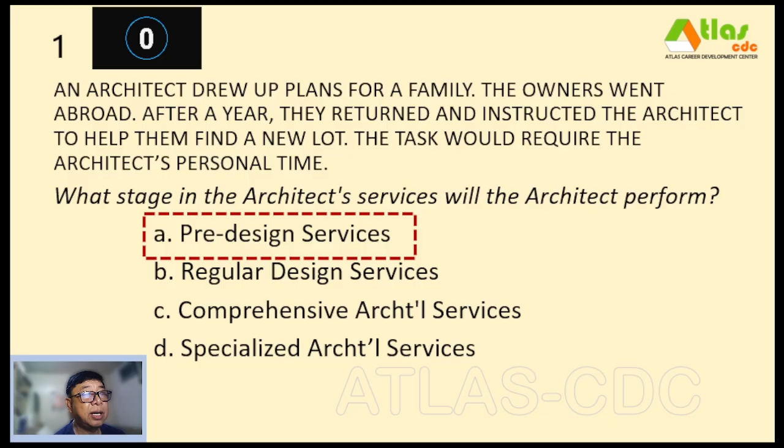Our correct answer is letter A, Pre-design services. Finding a new lot is under site selection and analysis under SPP Document 201, Pre-design Services. This entails the formulation of site criteria, assistance to the client in site evaluation, as well as analysis of the site to determine the most appropriate site or sites for a proposed project or building program.

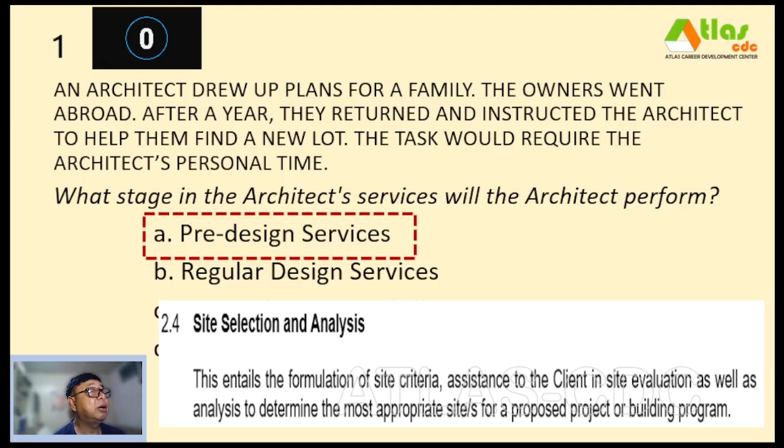Same situation, number 2. What will be the ideal method of compensation that the architect should use if he is to find a new site for the project? A. Percentage of construction cost. B. Per diem plus reimbursable expenses. C. MDPE. D. Lump sum inclusive of architect's fee.

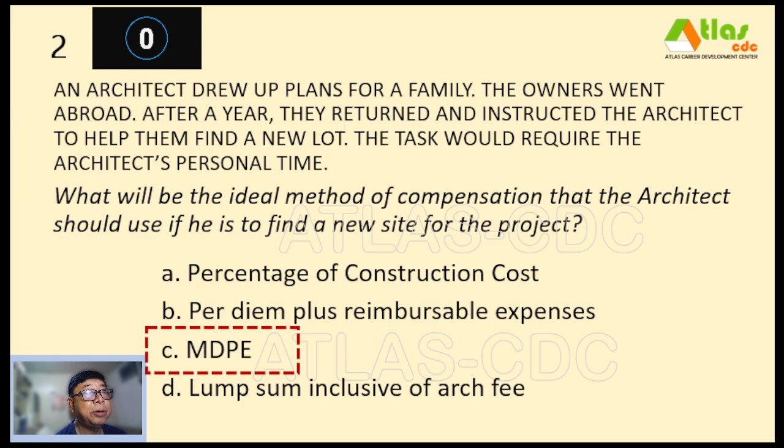Our correct answer is MDPE, or the Multiple of Direct Personnel Expense. Under pre-design services, MDPE is the most preferred method of compensation. This cost-based method is applicable only to non-creative work, such as accounting, secretarial, research, data gathering, preparation of reports, and the like. This method is based on technical hours spent and does not account for creative work, since the value of creative design cannot be measured by the length of time the designer has spent on his work.

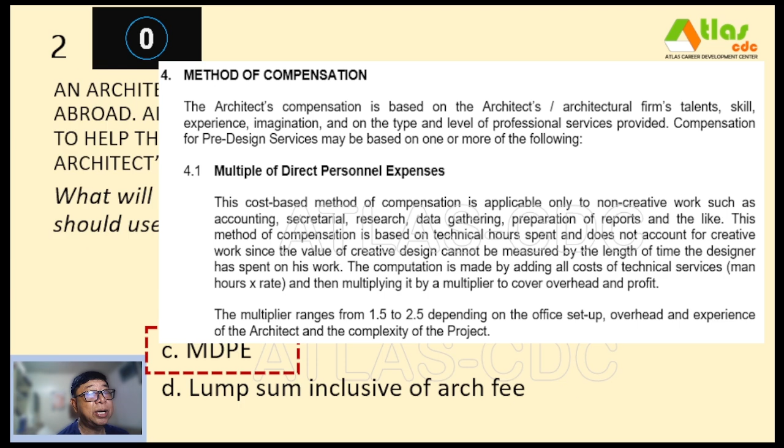The computation is made by adding all costs of technical services, man-hours times rate, then multiplying it by a multiplier to cover overhead and profit, wherein the multiplier ranges from 1.5 to 2.5 depending on the office setup, overhead, experience of the architect, and the complexity of the project.

The architect is asked to help find a new lot, but since that involves additional time and cost, suggesting a ready property—house and lot that only needs renovation—is a reasonable compromise to minimize spending and effort. While renovation can be more expensive per square meter, in this context, it minimizes overall expenditure because it avoids both buying land and building entirely new.

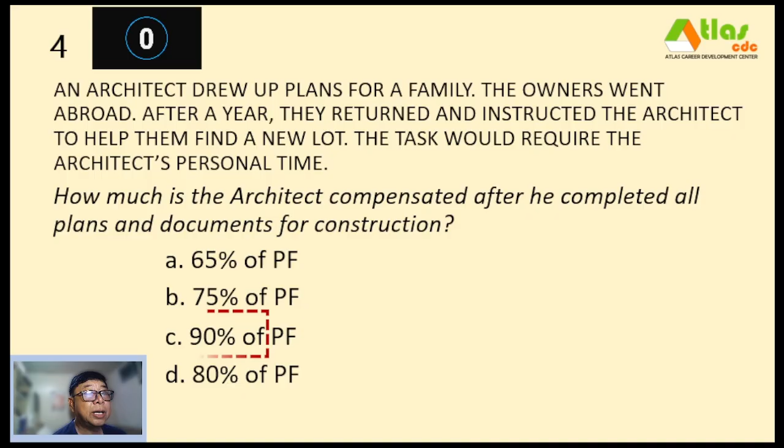Our correct answer is letter C, 90% of PF. As per the breakdown of payment, upon completion of the contract document services, the architect must have already received 90%. The total payments made to the architect should already total 90% of the professional fee.

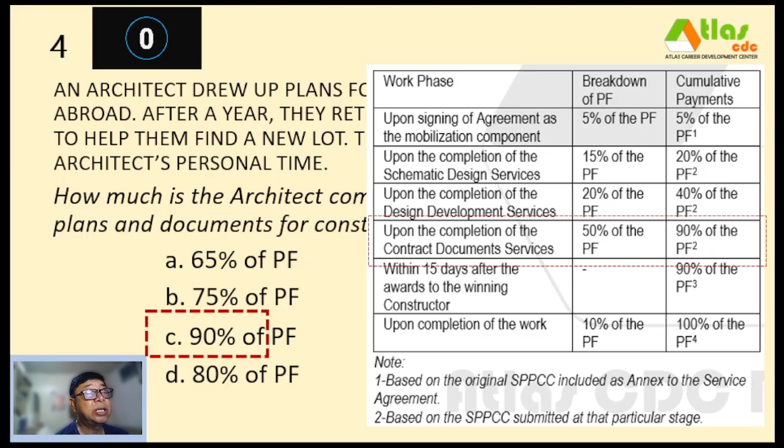Number 5. An architect who had been working in Singapore for 15 years decided, together with his family, to renounce his Philippine citizenship and acquire Singaporean citizenship. Since Singapore does not allow dual citizenship, he ceased to be a Filipino citizen. Upon returning to the Philippines, he was commissioned by a former classmate, now a property developer, to design a subdivision project. However, when he submitted the construction drawings, the Office of the Building Official (OBO) denied the building permit application. So what went wrong? A. The architect is already a Singaporean and not allowed to practice in the Philippines. B. The architect should have a permit to practice from PRBoA, given that he is a previous Filipino RLA. C. The architect failed to sign and seal the drawings. D. Error found in the drawings.

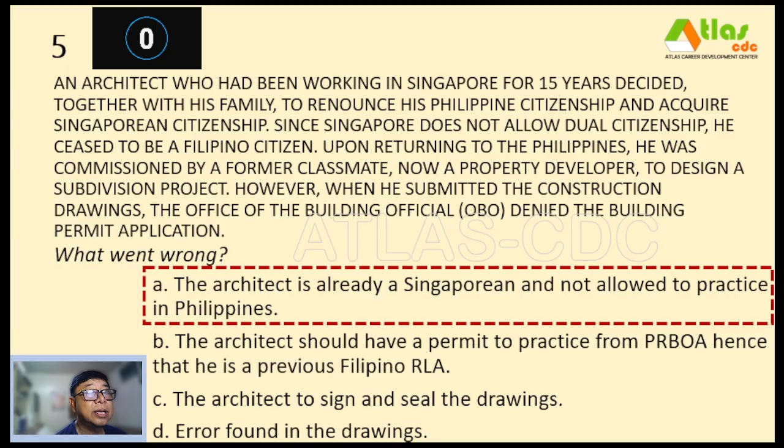Our correct answer is letter A, the architect is already a Singaporean and not allowed to practice in the Philippines. Under RA 9266, only a Filipino citizen who is a registered and licensed architect may practice architecture in the Philippines. Since the architect renounced his Philippine citizenship and became a Singaporean, he automatically lost his privilege to practice as a Filipino architect. Even though he was previously an RLA, foreign architects, including former Filipinos, can only practice in the Philippines if they obtain a temporary special permit from the PRC and PRBoA in accordance with Section 38 of RA 9266. Therefore, the OBO was correct in disapproving the building permit because the architect was no longer authorized to sign and seal architectural documents in the Philippines.

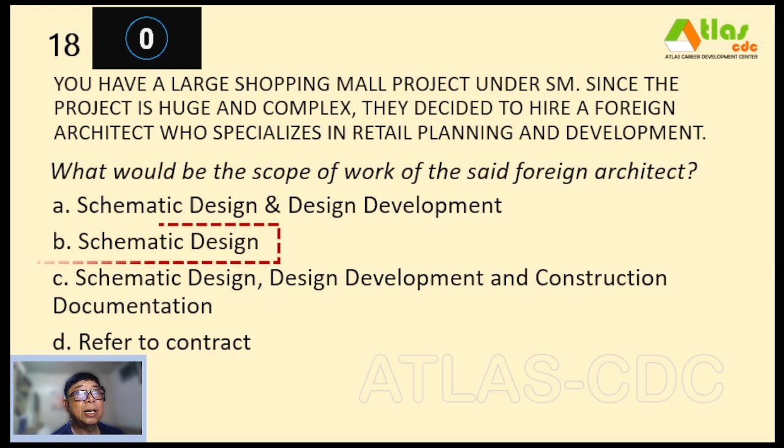Our correct answer is letter B, schematic design. In projects involving a foreign architect, the foreign architect is usually brought in for specialized services such as the conceptual design or schematic design for retail or mall projects. The local counterpart architect, also called the architect of record or AOR, is responsible for design development and contract documents, that is, construction documents. This is because only a local RLA, registered and licensed architect, can legally sign and seal documents and practice architecture in the Philippines.

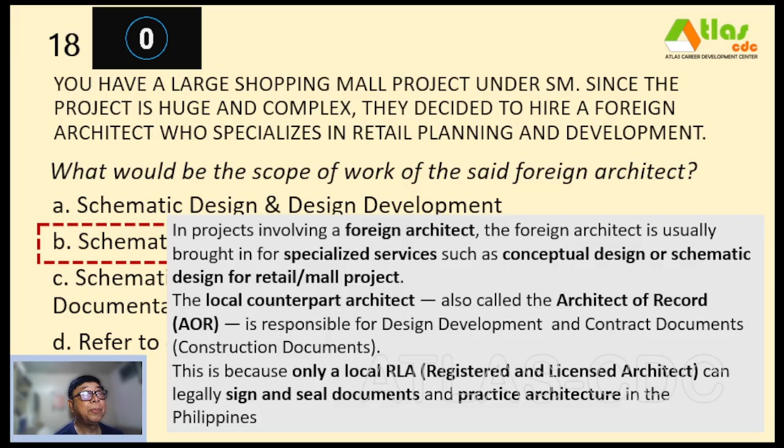Number 19, same situation. What would be the legal role of the said foreign architect under RA 9266? A. Retail architect. B. Consulting architect. C. Design consultant. D. Architect of record.

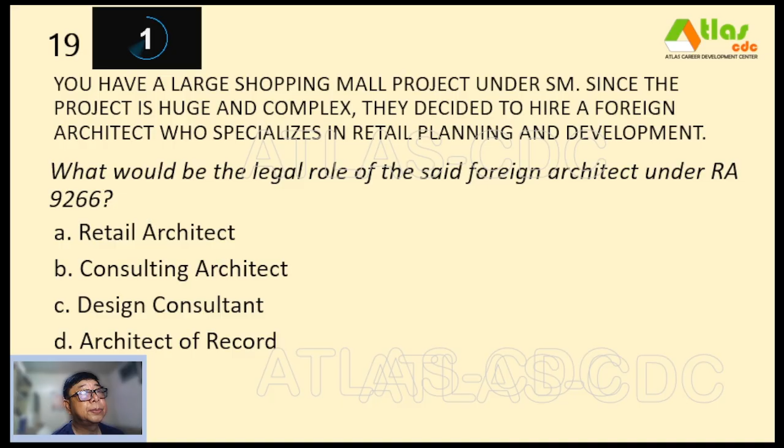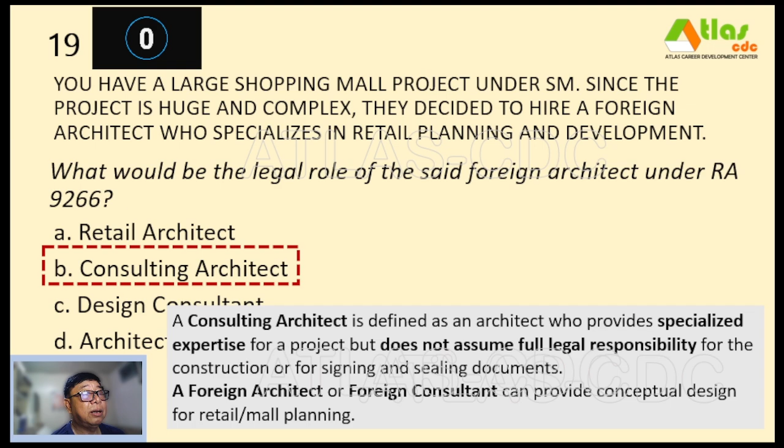Our correct answer is a consulting architect or foreign consulting architect. A consulting architect is defined as an architect who provides specialized expertise for a project but does not assume full legal responsibility for the construction or for signing and sealing documents. A foreign architect or foreign consultant can provide conceptual design for retail or mall planning.

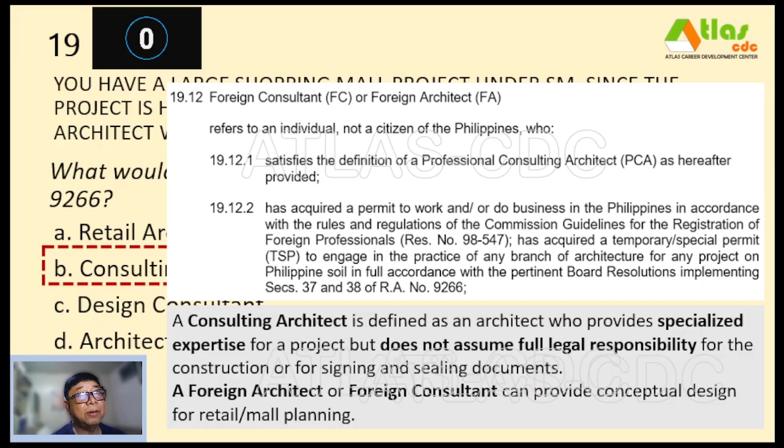The definition of foreign consultant or FC or foreign architect refers to an individual, not a citizen of the Philippines, who satisfies the definition of a professional consulting architect as hereafter provided, has acquired a permit to work or do business in the Philippines in accordance with the rules and regulations of the Commission guidelines for the registration of foreign professionals, has acquired the temporary special permit or TSP to engage in the practice of any branch of architecture for any project on Philippine soil, in full accordance with pertinent board resolutions implementing sections 37 and 38 of RA number 9266.

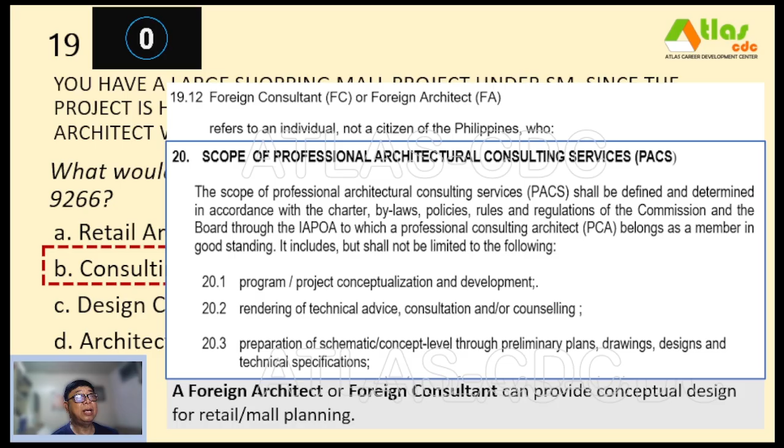So this is the scope of professional architectural consulting services or PACS. This is SPP document 209. The scope of PACS shall be defined and determined in accordance with the Charter, bylaws, policies, rules, and regulations of the Commission and the Board through the IAPOA, to which a professional consulting architect belongs as a member in good standing. It includes but shall not be limited to the following: program, project conceptualization and development, rendering of technical advice, consultation or counseling, and preparation of schematic, concept level through preliminary plans, drawings, designs, and technical specifications. This is for a Filipino consulting architect.

Number 20, same situation. What would be the role of the Filipino architect under RA 9266? A. Retail architect. B. Consulting architect. C. Design architect in collaboration with expert consultant. D. Architect of record.

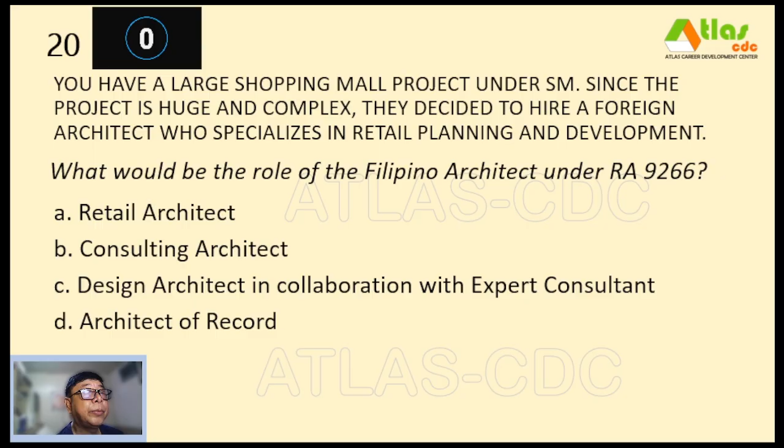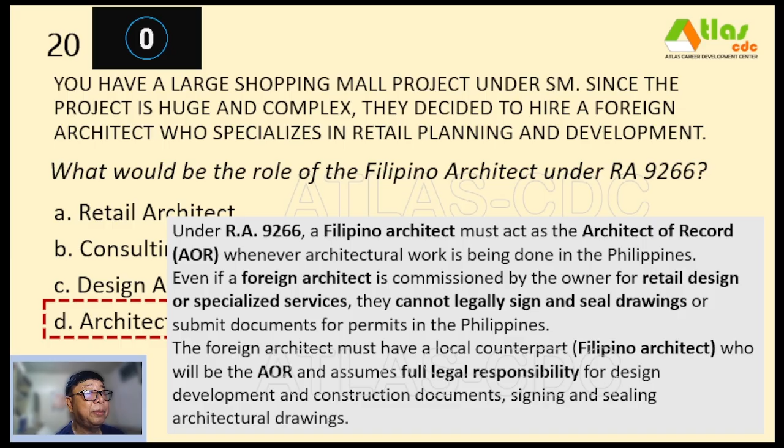Our correct answer is letter D, architect of record. Under RA 9266, a Filipino architect must act as the architect of record or AOR whenever architectural work is being done in the Philippines. Even if a foreign architect is commissioned by the owner for retail design or specialized services, they cannot legally sign and seal drawings or submit documents for permits in the Philippines. The foreign architect must have a local counterpart or Filipino architect who will be the AOR and assumes full legal responsibility for design development and construction documents, and signing and sealing of architectural drawings.

Number 21, same situation. What would be the scope of the Filipino architect? A. Schematic design and design development. B. Schematic design. C. Construction documentation and quality assurance. D. Refer to contract.

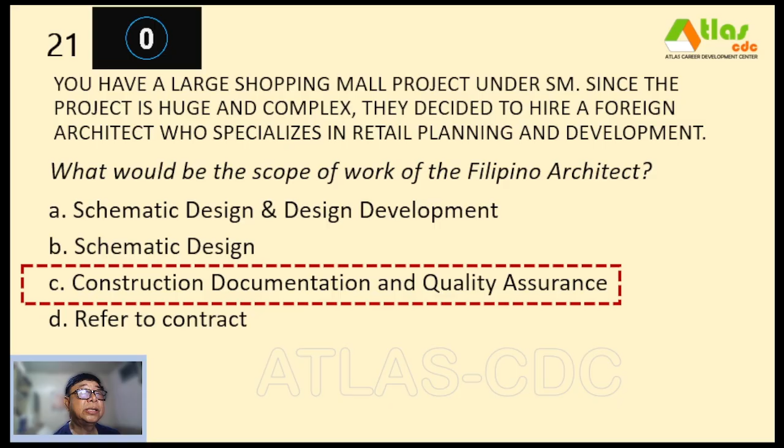And our correct answer is construction documentation and quality assurance. But it should be design development, because design development phase, contract document phase, and construction phase will be the role of the Filipino architect, okay?

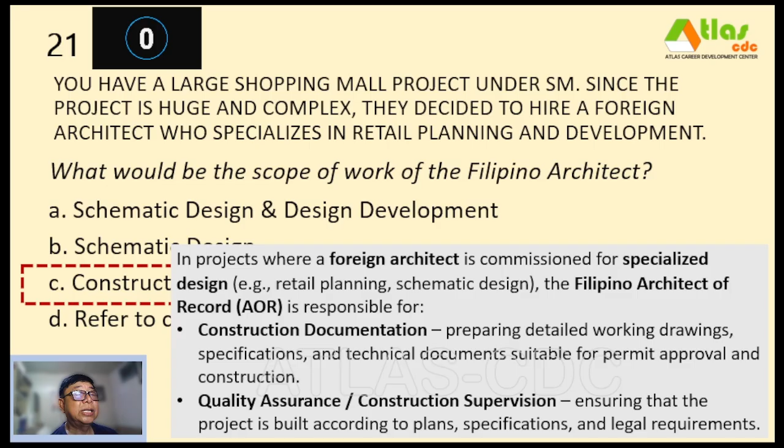So in projects where a foreign architect is commissioned for specialized design, that is retail planning, schematic design, the Filipino architect of record or AOR is responsible for construction documentation. This is the design development and contract document phase, preparing the detailed working drawings, specifications, and technical documents suitable for permit approval and construction. On the construction phase, quality assurance and construction supervision, ensuring that the project is built according to plans, specifications, and legal requirements.

So number 22, same situation. As far as the civil liability of the project is concerned, who is liable when the building collapses due to faulty construction? A. Architect. B. Architect in charge of construction. C. Consulting architect. And D. Architect of record.

And our correct answer is letter B, the architect in charge of construction. So the architect in charge of construction means an architect registered and licensed under RA number 9266 who is directly and professionally responsible and liable for the construction supervision of the project. So this is the liability under the civil code, the contractor as well as the professional in charge of construction, or the architect in charge of construction.

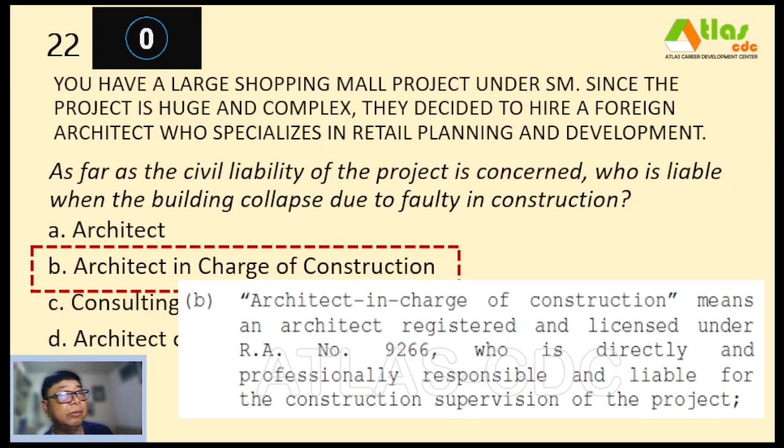So number 23, same situation. On this project, who is the professional that is academically qualified and with exceptional or recognized expertise or specialization in any branch of architecture? A. Architect of record. B. Foreign architect as consultant. C. Architect in charge. And D. Local architect.

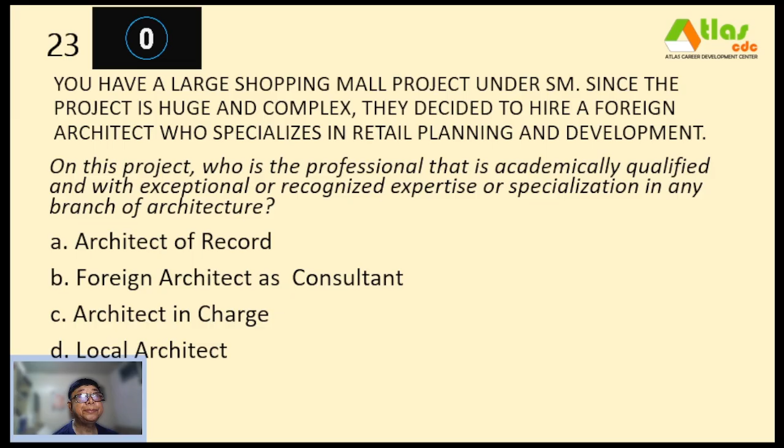And our correct answer is letter B, the foreign architect as the consultant. So a consulting architect means the architect registered and licensed or permitted to practice under RA number 9266 who is professionally and academically qualified and with exceptional or recognized expertise or specialization in any branch of architecture. So the foreign architect as the consulting architect. A foreign consultant refers to an individual, not a citizen of the Philippines, who satisfies the definition of a professional consulting architect.

24. After the hospital project construction, who is best for a client to hire in building maintenance? A. Architect specialized in machinery. B. Architect with track record in building and equipment maintenance. C. Building administrator with experience in maintenance. And D. None of the above.

And our correct answer is letter C, building administrator with experience in maintenance. So under SPP Document 205, Post-Construction Services, under Building and Facilities Administration, we have building maintenance, wherein the architect shall see to it that the building and all the parts thereof, structure, plumbing, electrical, partitions, finishes, etc., are all in good condition, including monitoring maintenance and upkeep services, cleanliness of corridors, lobby, stairs, and other common areas, exits, parking areas, and garbage collection.